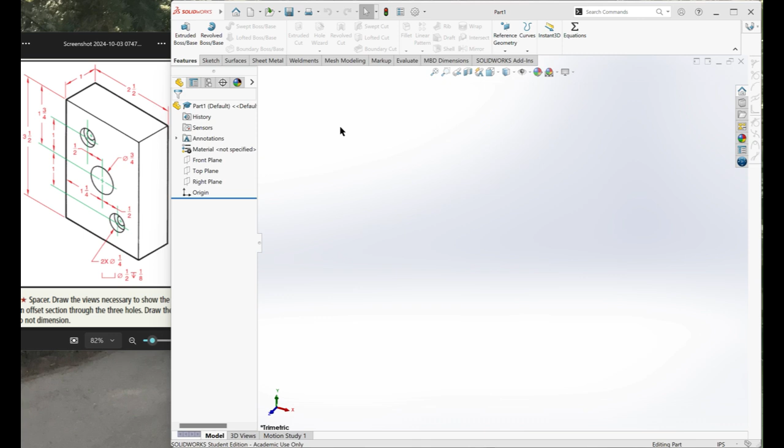So we're going to start ourselves off with a sketch. We're going to put it on the front plane. I'm going to grab myself my center rectangle. And let's see, I want this to be 3.5 high by 2.5 wide. You can see I'm just entering them as I make the shape, doing this a little bit different this time.

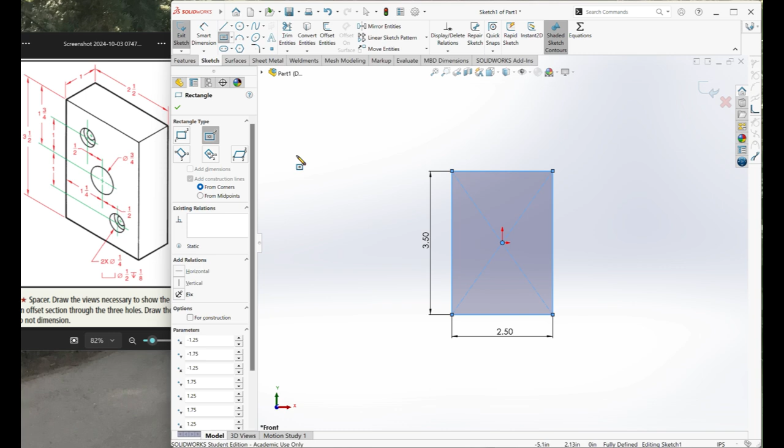Let's see, now I can extrude, so I will make this a feature. I will extrude it. I'm going to want to bring it out 1 inch.

Excellent. Now if I go up into my hole wizard, it's going to give me some options. I can just do a plain hole for the center.

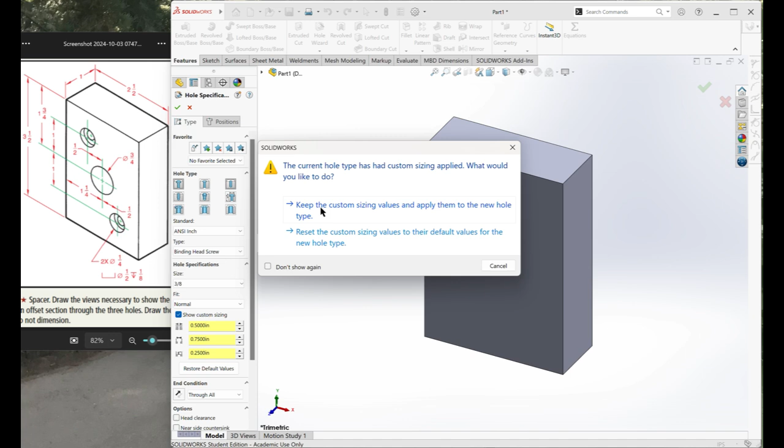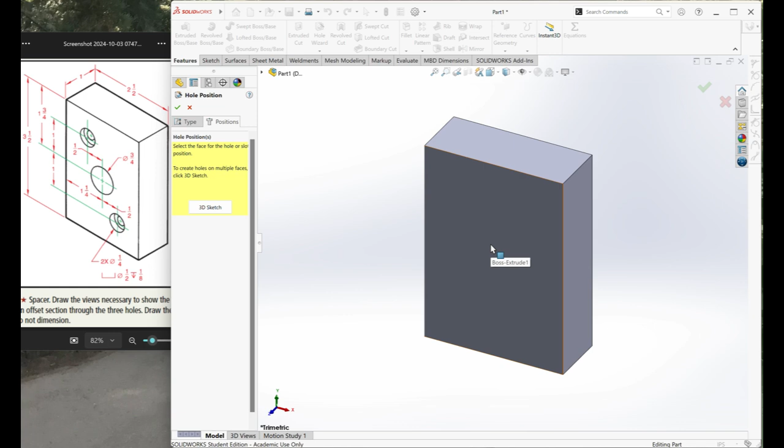And for the hole size, I want it to be 3/4 of an inch. So I can come down here and I can scroll down until I find my 3/4, right there, and condition is through all. So for my position, now I can come out here, click on the surface where I want it, go right to the center. There we go. That should give me a 3/4 inch diameter hole straight through the block.

I'm going to basically do the same thing with these other two holes. Hole wizard. These ones will be a little bit more complicated because these are going to be counter bore. So I just click on the counter bore.

And now I come down here, and for the size, I'm going to say show custom sizing. And here I'm just going to type in the measurements that I want. So these are going to have a hole width, a diameter of 1/4 of an inch. Now I'll come down here, 0.25. Now the counter bore is going to have a diameter of 1/2 inch, 0.5. And the counter bore depth is going to be 1/8 of an inch. You can just say 1/8, let the computer do the math.

Oh, it didn't like that one for some reason. 1/8. All right, so I know that 1/8 is 0.125. For some reason, it doesn't like to calculate in there. Looks like I just learned something new as well.

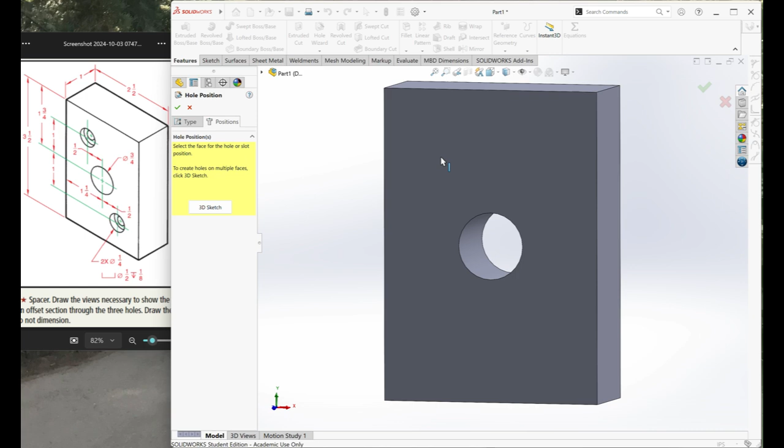All right, so I have the size of my hole. Now I just need to position it. So I'll click on the surface where I want it to be, and it's going to have one approximately here and one approximately there. Now I just go up into my Smart Dimension tool, and I can say exactly where I want it. So center of hole to center, come out to the side here, and this is supposed to be 1 inch.

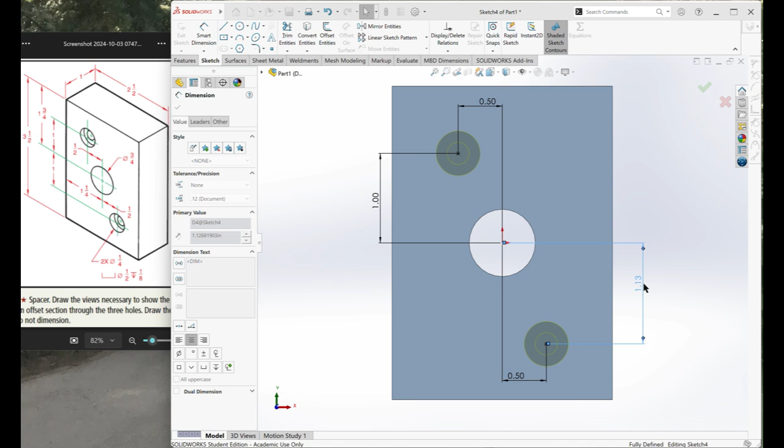And then center, going up to the top, this is supposed to be 0.5 inch. And I'm going to do the same thing with the other one. So center to center. Oh, I got off my Smart Dimension tool. There we go, we'll get back on it. Center to center. There we go, I got my 0.5 inch. And center to center. That's my 1 inch. All right, green tick mark.

There you go. So that is just a quick and dirty way to do essentially the exact same build for the spacer, but we use the hole wizard. If I moved a little too fast on any of that, go back and watch the other spacer video where I put the holes in individually. That should help fill in any blanks.